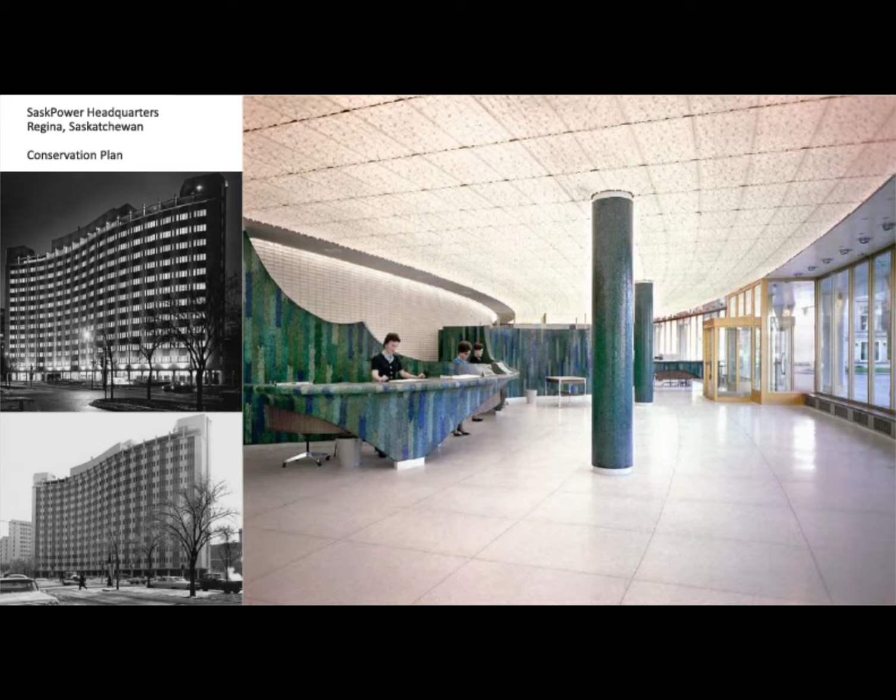So we very quickly sketched out a framework from which now a new design can emerge to make sensitive changes to the building entry, to the facades, to the roof, in a way that is in harmony with what this building was trying to be. And I like to show this as an example of where this has been very successful.

The Barbican, which is an enormous modern complex in London. Some of you may know it houses, I think, between 30 and 40,000 people, and it's got an entertainment center. It's got all kinds of things. It's a real sort of city within the city. And some years ago they started developing a series of design guidelines, which everyone has to use, and they are not as restrictive as one might think.

I mean, the whole idea of this, and the guy who did it, John Allen, is particularly sensitive to this, is that you can't just tell people you can't do things. You've got to tell them, here's your opportunity to do X, Y, or Z, not you are restricted from doing X, Y, or Z. And it makes all the difference in the world to cast it in those terms and in that mindset, so you're enabling people to do this well.

So, many of you are probably engaged in working with historic buildings. Some of you may even already be working with modern buildings. Is it different? And if it's different, why? I think, as with all of these things, there are multiple answers to these questions. But certainly, the big things, of course, are the idea of material versus idea.

In so many modern buildings, when the buildings wear out, rather than the material gaining a patina, which you can sort of scrub up and restore the way you can with stone, or even with good quality aged wood or copper, it's hard with many of the modern materials, especially if they're part of systems, to do that in a way that makes any kind of sense economically or from a sustainability standpoint. And so this notion has come up, well, maybe we're preserving the idea of what the building is, even if we're replacing the material. And there's a lot of validity to that, but there's also a lot of debate, and it's something where you have to be constantly vigilant in analyzing that.

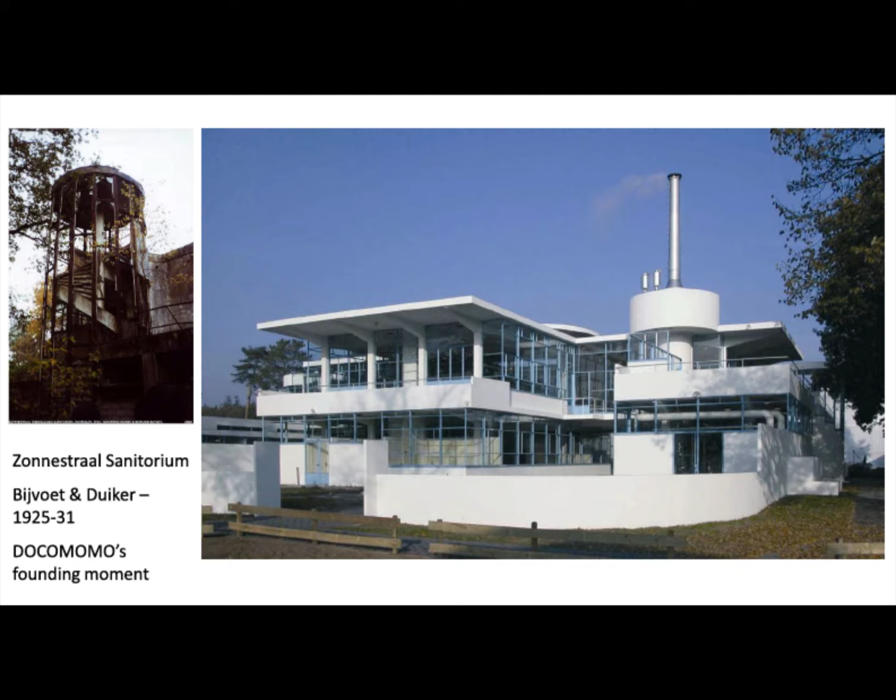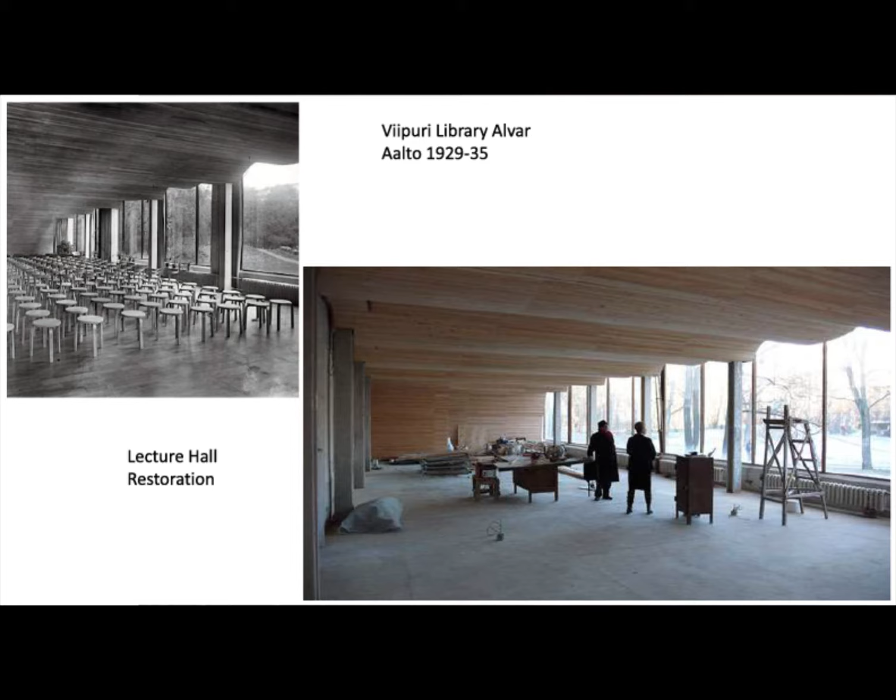Another example is a building of Alvar Aalto's, and most of Aalto's work actually does age much better than most modern buildings. This is an early one, and it's had its problems. The Viipuri Library was taken by the Russians in 1939 in the Winter War, and they kind of let it go. The ceiling that you see there in the upper left photo had completely disappeared. So here again, through a very concerted international effort, money has been raised to rebuild this, and in this photo you see the beautiful completed product.

But again, it's the recreation of something that had disappeared. And to a lot of preservation purists, that's a head scratcher. It's a little bit of a problem. It's not to say that they shouldn't have done it, but I think it's something that we need to constantly keep in mind and be vigilant about as we're working through these buildings.

So here's the statement about how much stuff we're dealing with. Between 1945 and 1980, more was built around the world than had ever been built in the history of mankind. I haven't been able to get data to actually substantiate my statement there, but if you think of all the building that's been going on in Asia and China especially, it's probably true. Certainly the population has doubled since then.

So the fact is, as the building stock from the 50s and 60s and 70s and even the 80s and 90s begins to age, we can't just throw this stuff away and say, well, now we're going to build high-performance, sustainable buildings, which unfortunately is exactly what the USGBC had been telling us for years. They've kind of pulled back a little, and they recognize more of the value of trying to save and retrofit buildings. But it's not easy, and in many cases, it's a very hard sell.

So these are some of the issues that we're dealing with. I don't need to read those out for you. I think these are self-explanatory, and then the technical challenges that go along with that. And so let's touch on a couple of the particular typological notions that we're dealing with. First is a curtain wall.

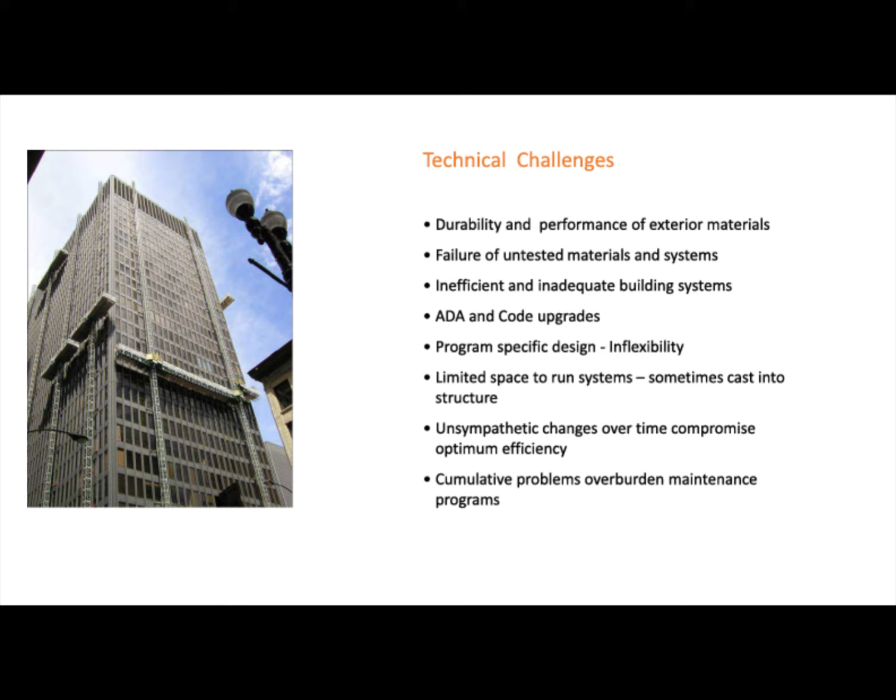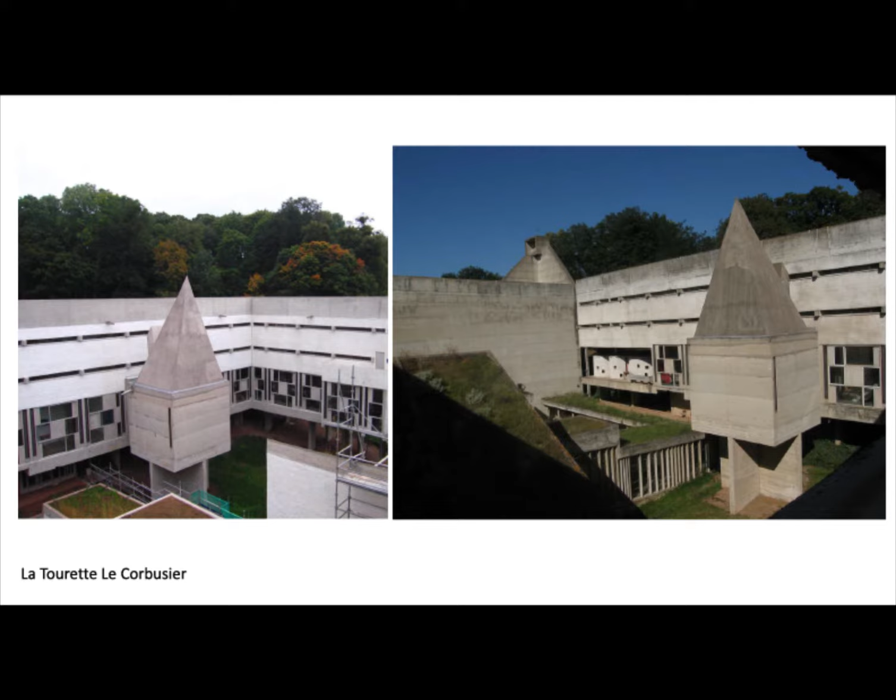And unfortunately, sometimes people, even in the best of situations, fall prey to the temptation to paint. I don't know why someone has painted this wall in the courtyard at La Tourette, which is one of the great concrete buildings of all time. There may be something somewhere that says it was okay to paint these particular levels. I don't know. But once you paint concrete, it's something different. It's not the same material anymore. It doesn't have the same kind of depth or resonance. It's not really a natural material, but it feels in many ways like a natural material.

So again, these are cautionary tales. These are the kinds of things you need to look out for. And I think certainly anybody who's working on a building that involves concrete conservation, get expert help. There are experts out there. It's never going to be perfect, but at least there are people who will guarantee that you will get not only the best appearance, but the most long-lasting technical solutions. There are people who are evolving better and better technical solutions to concrete repair.

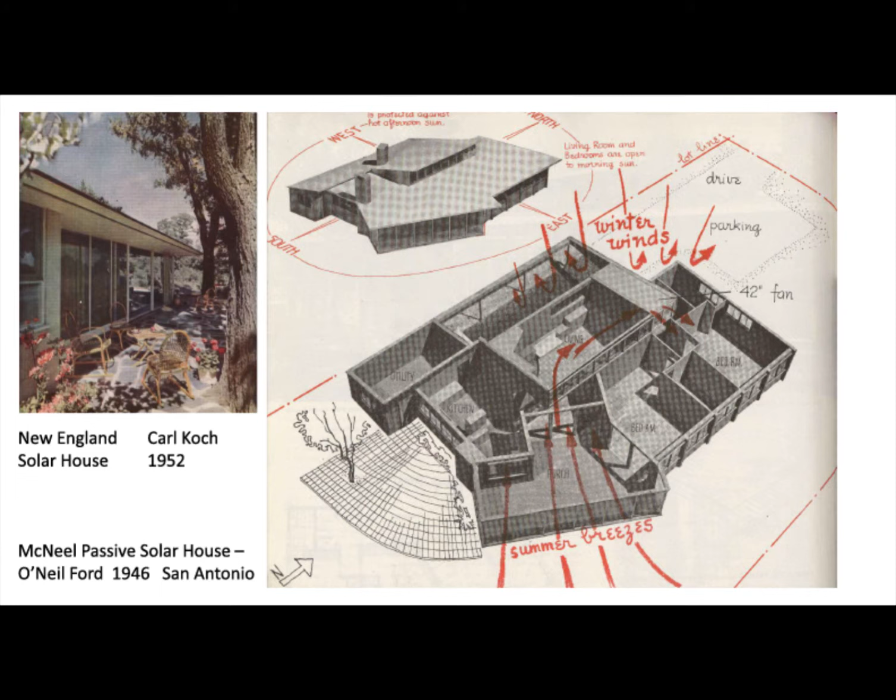And I live in a house that was designed in 1949 by a local architect outside of Boston. Very, very sensitive to sun angles in terms of how the sun comes in the winter and the summer, how it's sited, where the trees are. So these are not things that we have found anew since the late 60s or 70s. They were wisdom that was there and then perhaps lost and retrieved.

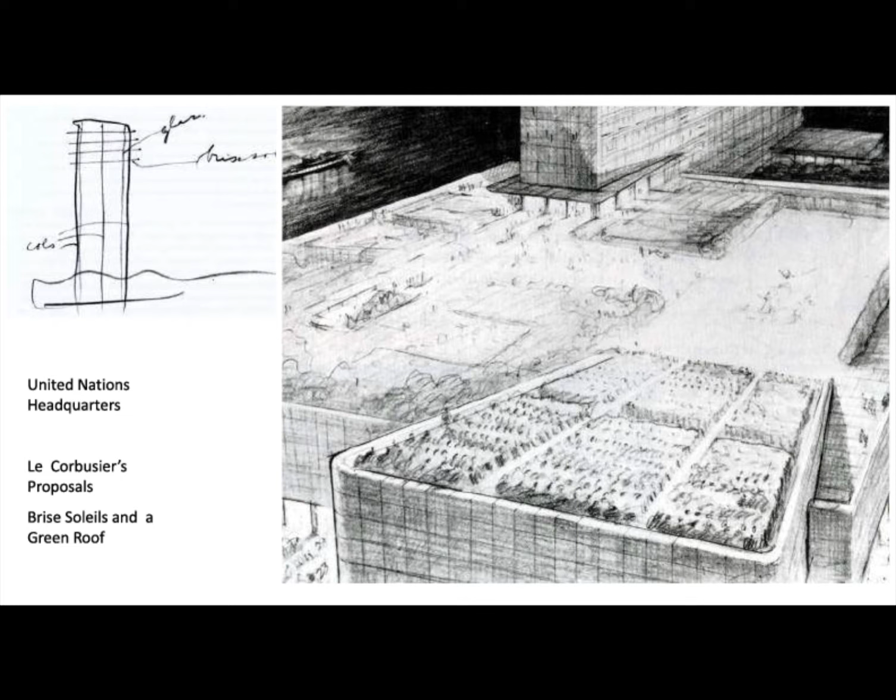And Le Corbusier's proposals for the United Nations. He wanted to put brise soleil to shield the west facade, because he had learned the hard way that you have to do that with his Cité de Refuge in Paris, the Salvation Army building, which he designed as a sealed facade with no sun shading and everybody inside cooked. So they had to go back and redo that. So he wasn't going to make that mistake twice. But he also proposed a green roof for the General Assembly. Never executed, but again, these are things to be reminded about, because this is 1947 that this is happening.

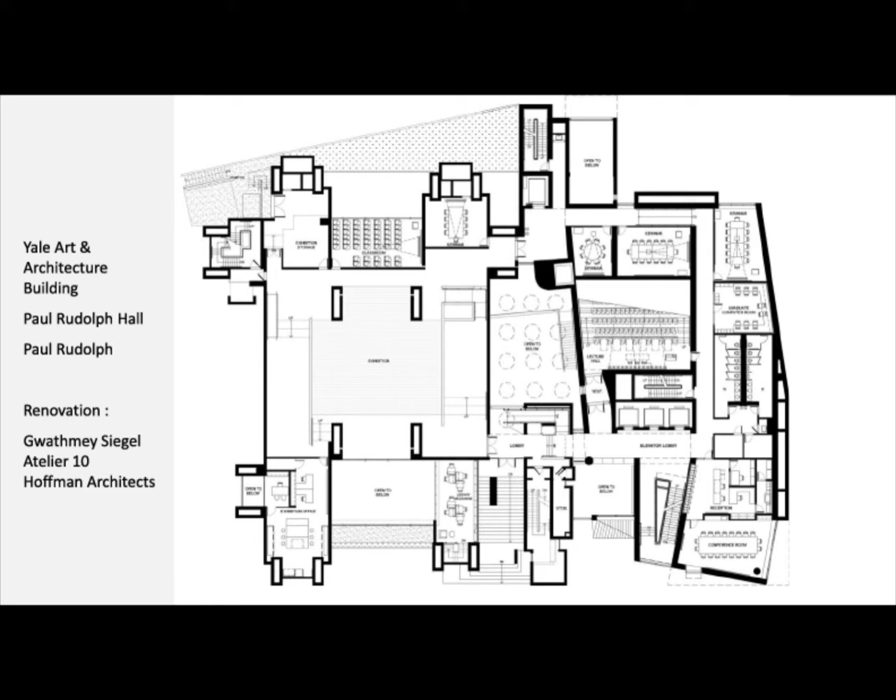But from the point of view of enabling the restoration of spaces like this and other things within the old Rudolph building, it did its job. But it's not something that everybody can do. It's a very expensive, time-consuming, exacting process that probably is only really worth doing on buildings of this level of significance. And again, as I mentioned, Atelier 10 was very involved from a sustainability standpoint, and in that it is a model project of what one can do with a modern building.

There's a whole lecture that goes with that. I'm just making you aware that it's out there, because they did a lot of things to really maximize the potential of what was in this building through very careful analysis, strategic use of sun shading, and what they did with the mechanical systems, airflow, all kinds of things.

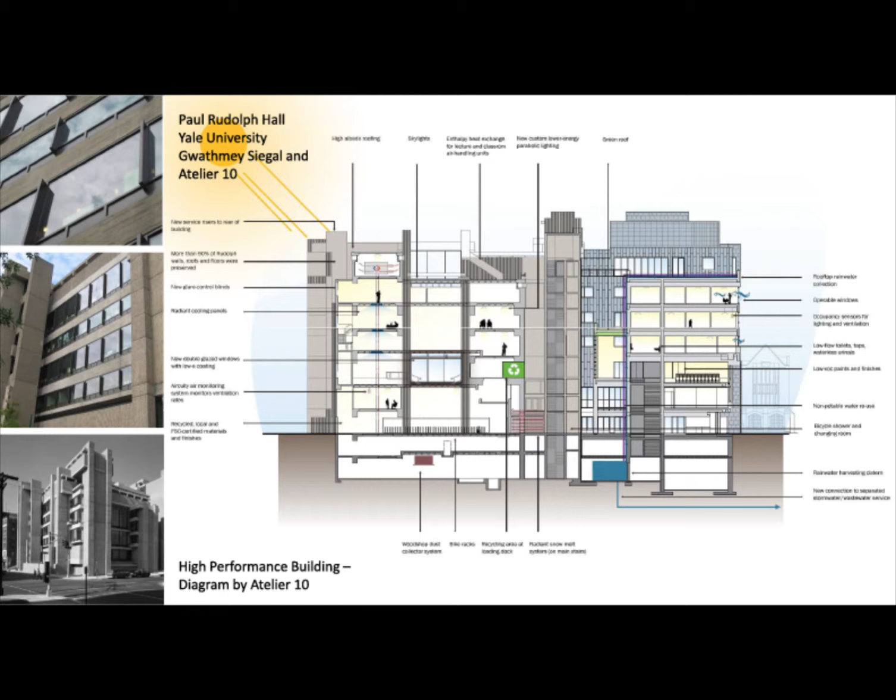Very exemplary project. Sometimes it doesn't work. Sometimes no matter what you do and how hard you argue, a building with the significance of Bertram Goldberg's Prentice Women's Hospital in Chicago, it's just that the land is too valuable, and frankly the use was too locked in. It's a cloverleaf-shaped building with radial rooms inside, and everything's done in reinforced concrete. What do you do?

So we do lose these. We've lost the Paul Rudolph Government Center in Goshen, New York, to a very insensitive addition and renovation. We've completely lost the Third Church by I.M. Pei near the White House in Washington. There are many examples of these.

So, a little bit on design and Secretary of the Interior standards. I want to look a little at the whole idea of language and compatibility, and how one sort of fits things together here. The idea is, of course, that it's supposed to be differentiated. It's supposed to be harmonious, compatible, but different. And there are many different ways one can do this.

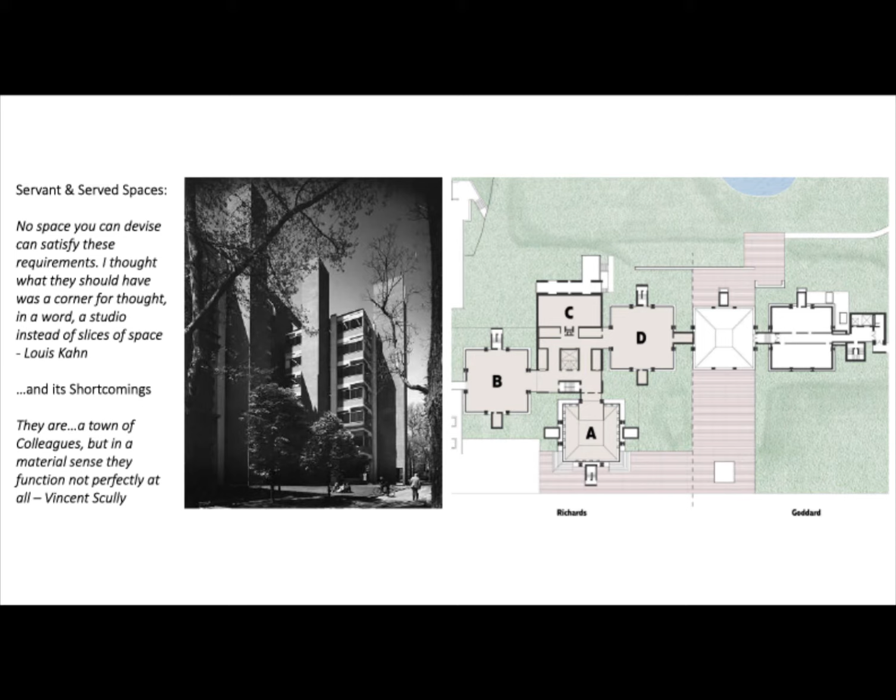So I'll quickly go through these, just show you some studies how much he was really fascinated by the idea of how you express it. Those are duct shafts, that's all they are, and the idea that there's more air coming at every floor. And then here, these many articulations of the Vierendeel trusses getting thinner and thinner as they come off of the cantilevered columns here.

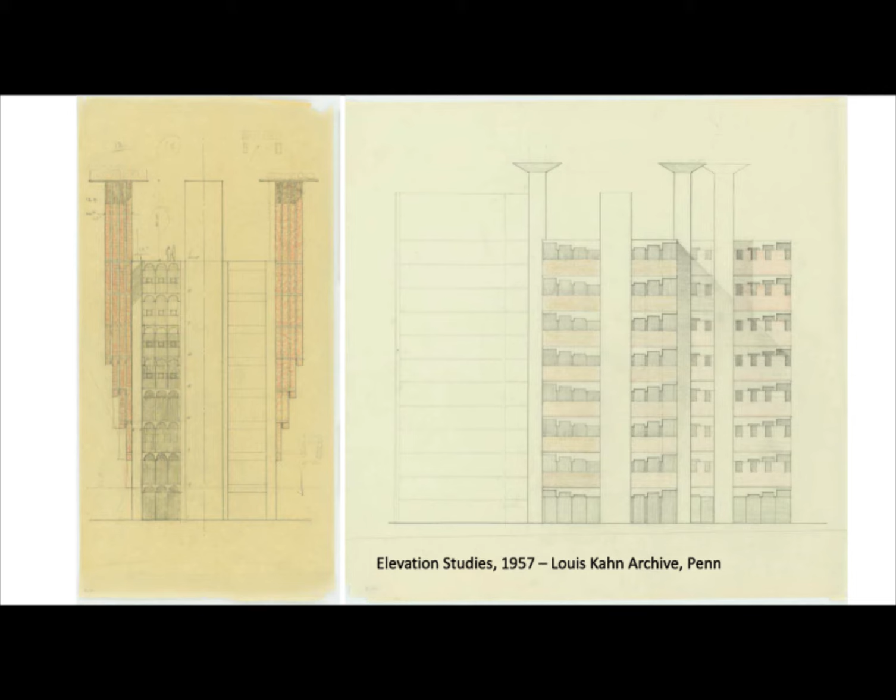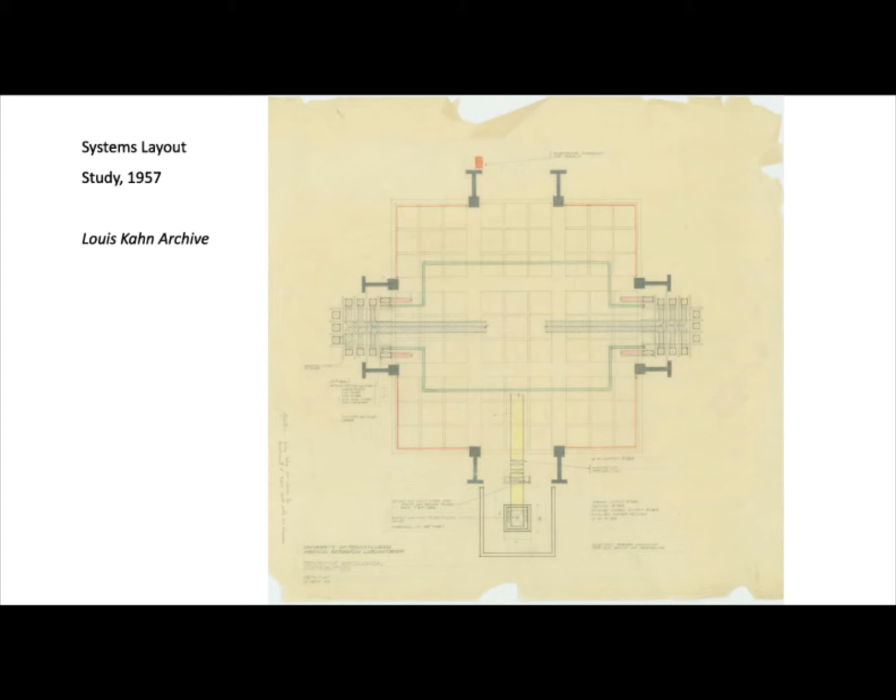So there's a very literal and almost childlike, passionate investigation of this stuff in the early stages of the Richards building. And here that is in plan. You see that even early in schematics, he's already doing his duct and pipe layouts to see how that's all going to work off of these individual tray floors.

So what you have here then, as the building comes together, is a system of poured-in-place concrete columns, precast Vierendeel frames, which are these things, coming together in an ideal, which is this 9-square grid with a 4-square grid inside. It got value-engineered down from 9 and 9 to 4 and 9, which is really a much more elegant solution.

But then here's the architecture. Here you can see where all of these partitions are dividing up these floors. And Kahn just kind of did, he didn't want to know about that. It had to be there, but it was foreshadowing being very problematic.

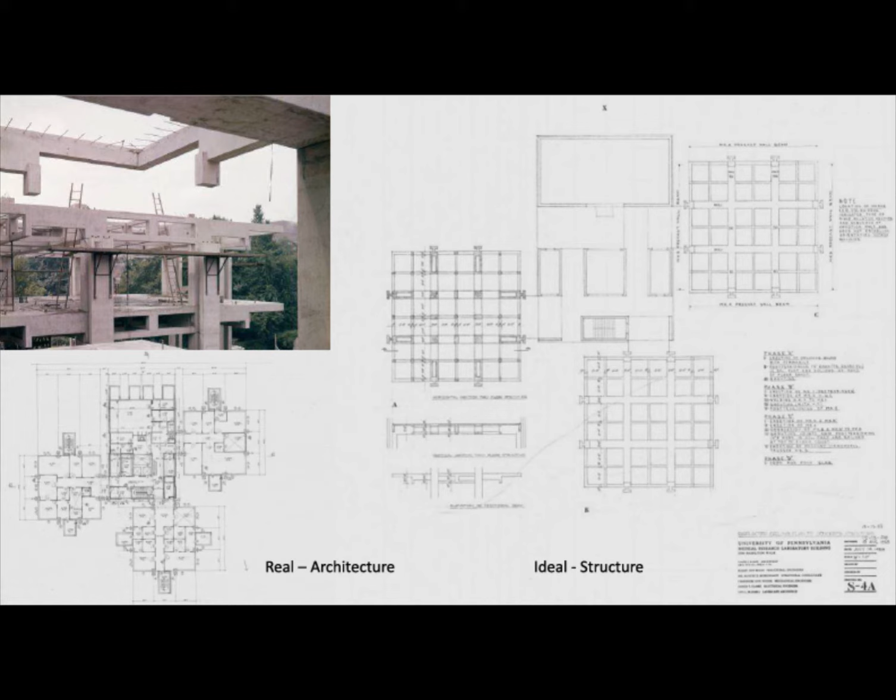So here you see the building being built, a couple of photos in construction. Very profound, literal expression of how the structure works in this building, and then how the systems were laid out.

You have here the design principles, which are very clearly stated in the working drawings about where you put each system. It's all called out here. It's all layered and leveled.

And interestingly enough, when they started building this, there had been a change in the drawings, and the contractor started laying this out, and Kahn came and said, you have it all wrong. He actually made them tear out all the existing ductwork and do it again because it didn't meet his standards. And I think that was probably the beginning of some trouble with the University of Pennsylvania.

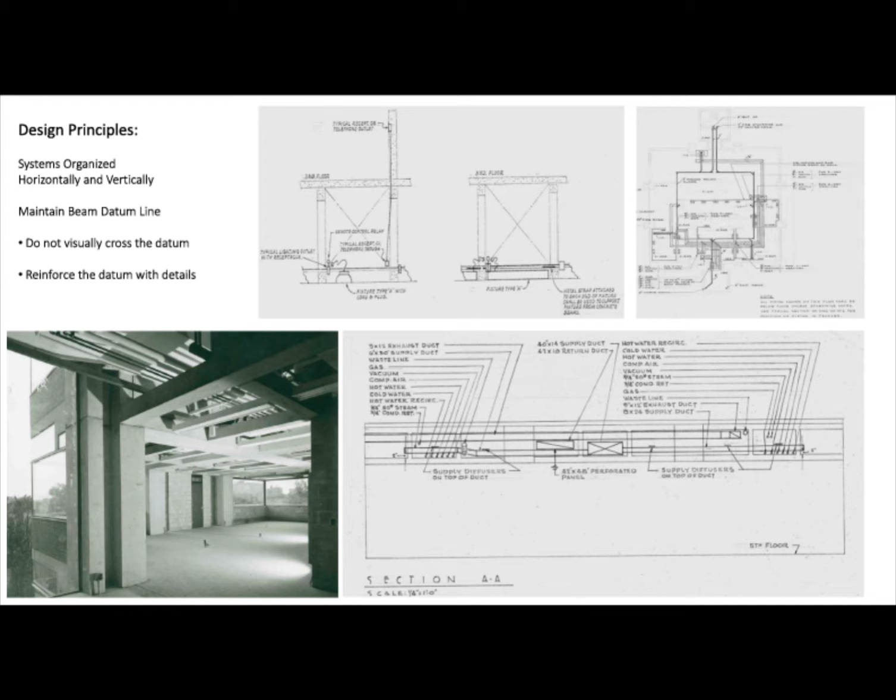But in any case, what you see here, this is really the ideal. This is so you have the structure, you have the systems beautifully layered, and you have this open universal concept. It's the closest thing Kahn comes to an idea of universal space, because Louis Kahn really is about rooms, not about space. But with the open corners, I think here he's pushing that envelope in a way that he never did in his subsequent work.

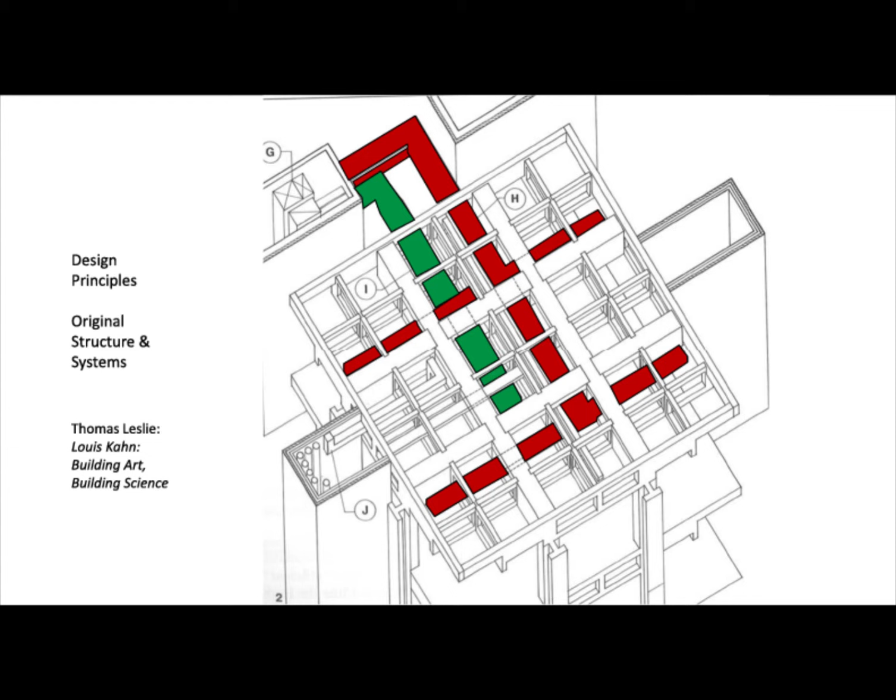And there you see this beautiful diagram from Thomas Leslie's Building Art, Building Science, about how that all goes together. So in the end, this is the building in its purest form. This is after the basic construction is complete, but before all the partitions go in.

And it's really these series of lovely stacked vitrines. You can stand in the corner and look off to the people across the way in the other corner. You could do that even after the work was finished. But it's very much this idea

about individuality and community at the same time, which the greatest architects of the 20th century were all very obsessed with. I think Alvar Aalto did that, Kahn did that. They were people who really understood that balance between the space for the individual and the idea of the larger community space.

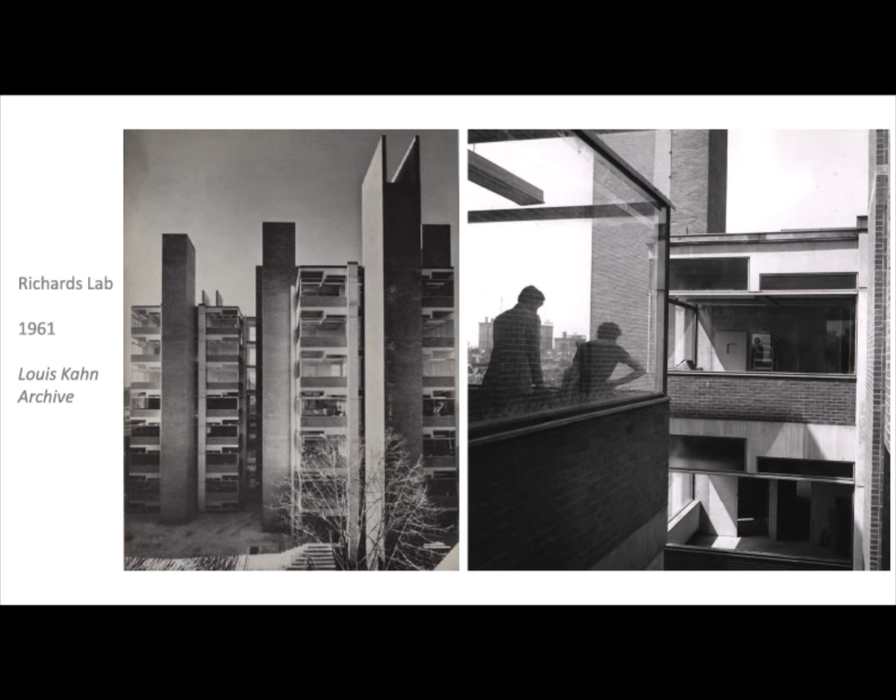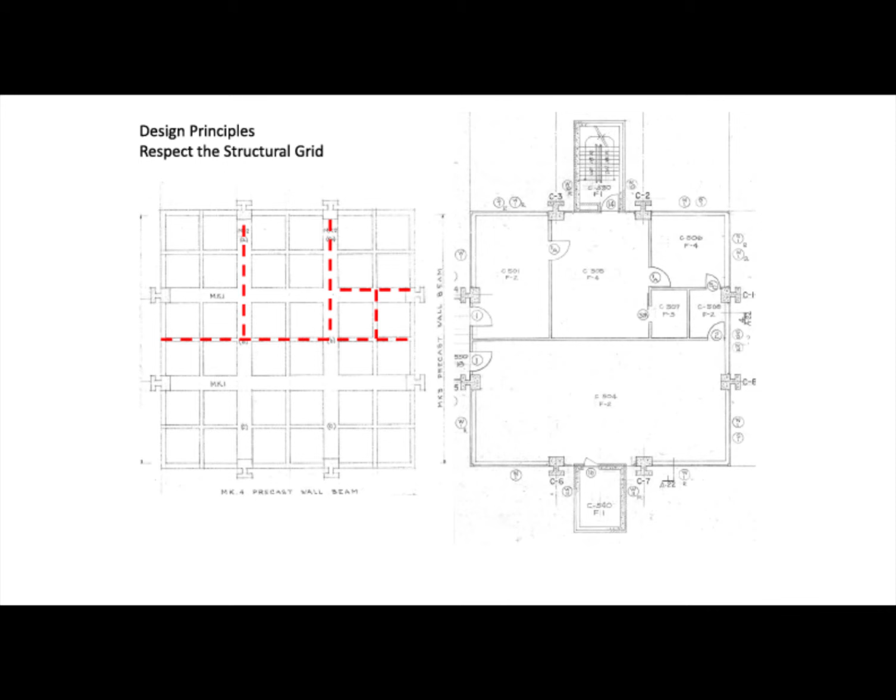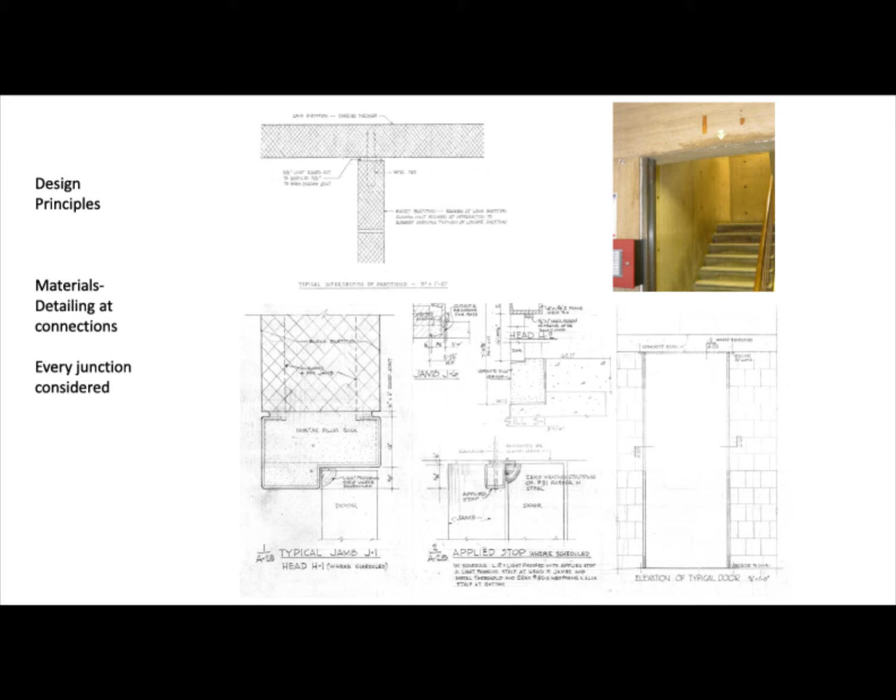We turned it from a wet lab, in short, into a Center for Cognitive Neuroscience. So we basically took all of the fume hoods out, all of the wet bench out. It's all computational at this point, so that made our job a lot easier. I think this is a case where a change in use and adaptive use was important really to save the building, and then make the building function better. That's really what we were after here.

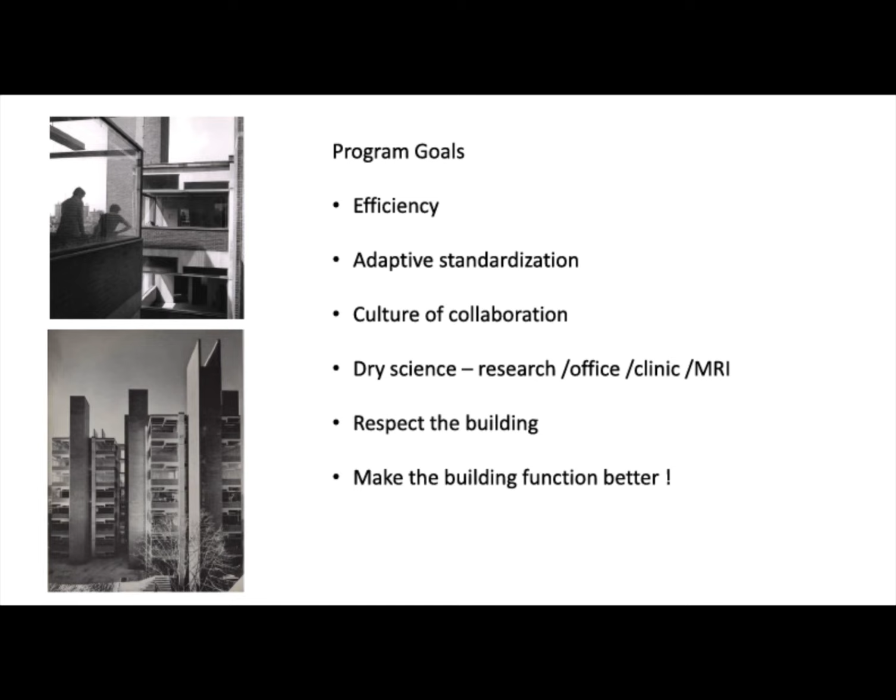you would think they would be the most important part. They are on the outside. But on the inside, because they were all cut up into these little rabbit warrens, there was nothing of significance in that. So we said, there are principles to be respected, there are guidelines you're going to have to follow, but it's not going to be the reconstruction of what was there.

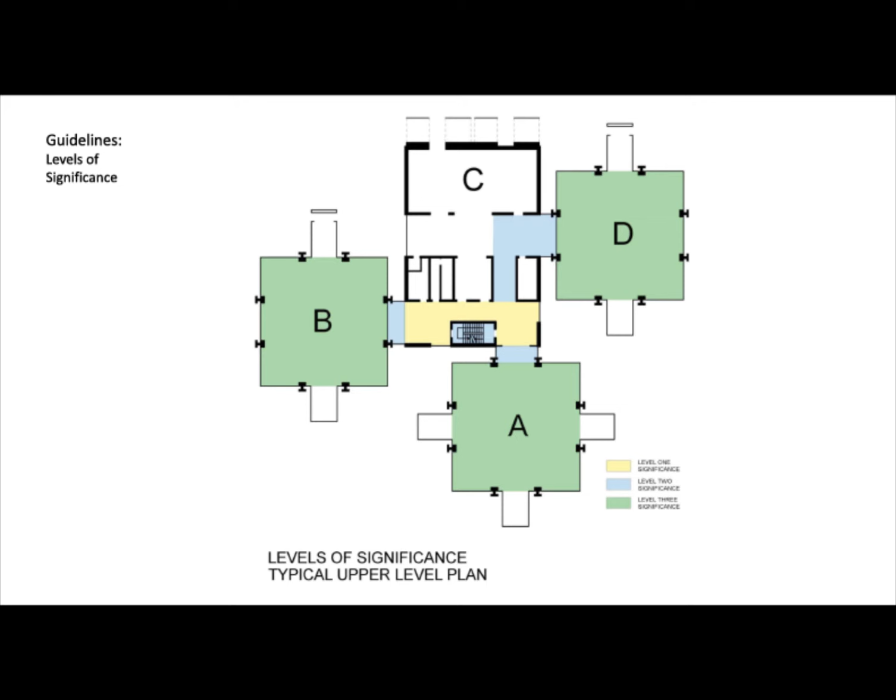So there you see the original 5th floor plan and what our design did, and I will talk about the evolution of how this came about.

So first of all, you have the reprogramming of the interior spaces in the C tower—I won't go into that—and then you have the offices in the D tower. Very important here for the offices is that we had to find a way to make these egalitarian. There used to be that an office would go like that, which would give you a big corner office and a little inside office. Penn wouldn't allow it.

They said, you have to find a way to make these egalitarian, the same. So we looked at the grid and said, all right, what we have to do is find a way to offset, to actually set off from the grid. And we found a precedent, both in this building and in other works of Kahn, for how he does that—how he says, okay, I've got these very strongly articulated grids, but sometimes you've got to move things, so here's a way to do it. So we took that as our clue as we designed a way to manage these offsets.

And then, so that's the idea of the right sizing, because that's what the office size used to be. And then also very important was to honor the original idea of the open floor by always leaving one corner open. So what we were also able to do in democratizing these sizes here is create a wide enough zone in the center to put in these workstations. So that now you can set up a whole bunch of graduate student workstations here. You put another cohort in the corner.

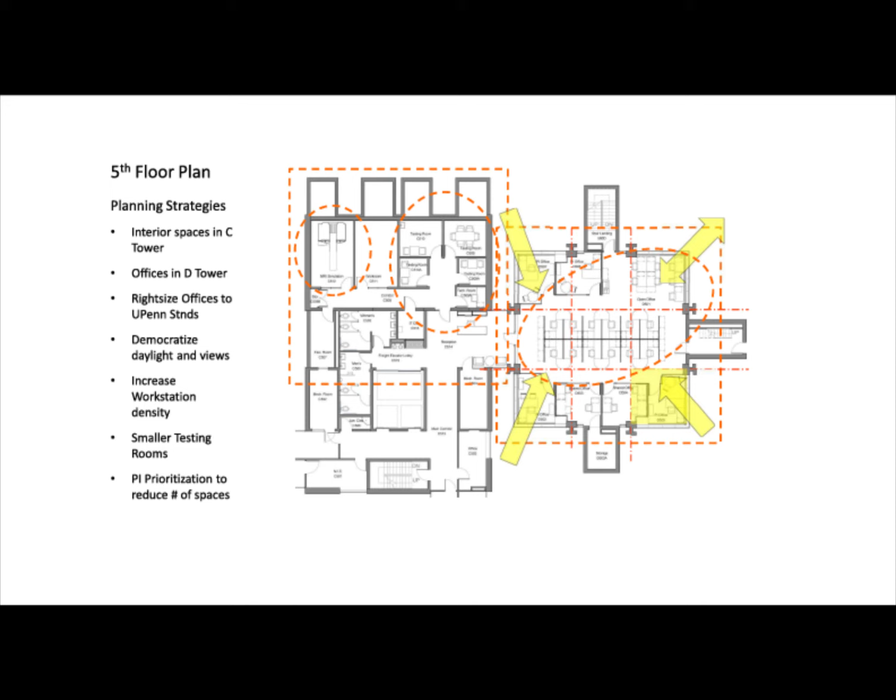It's open, and you really get a sense with the glazing of these partitions and all that you've got a very nice, manageable open space. So that's, and then the testing rooms and the reduction. So I'm going to take you very quickly through what we did with the glazing.

This building here on the left is the American Federation of Labor Medical Services building. It doesn't exist anymore. It was built just before Richards in Philadelphia. And I show it because it's the first time Kahn used a system for the windows of a custom-formed brake metal and stainless steel. Kahn didn't like the windows that were out there. He didn't like steel windows. He didn't like the aluminum windows. He tried them both. He was not happy with them, and he began to develop his own bespoke system, which he used all the way from this building to the end of his career, right up through the Yale Center for British Art in the 1970s.

So just to look at some of the issues we were dealing with, obviously there's the issue of solar gain. They had these cool shades which were taken off at some point in the distant past and never functioned very well. We also had movement in the building. If you sight down that corner, you'll see that the corners are tipped out, the bricks move, and so we're not dealing with sort of perfectly planar elements. And then here again, other examples of the shading.

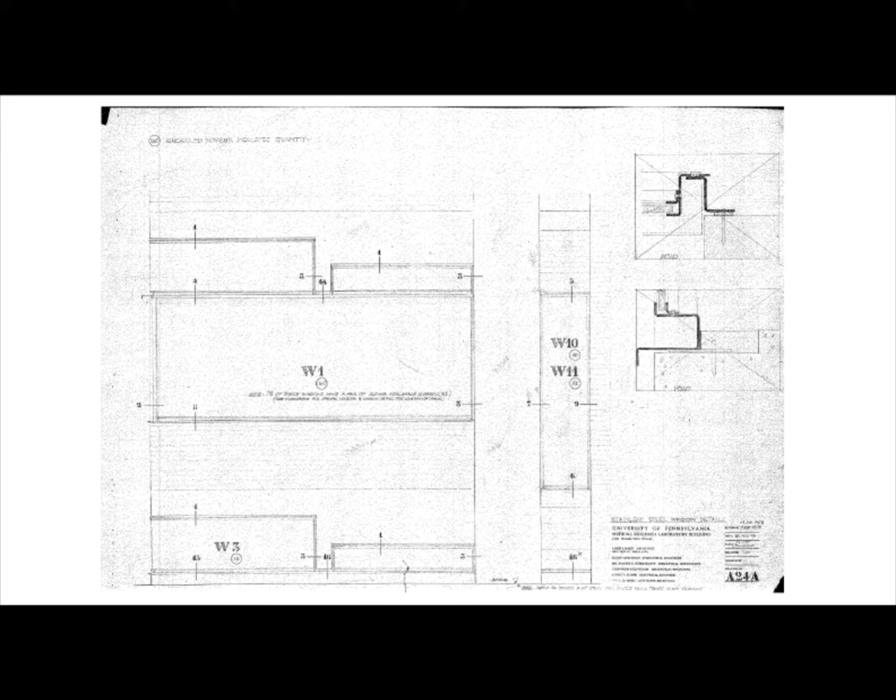Kahn's original glazing details: you see this is a very big window that's almost 15 feet wide by 5.5 feet high. So these are substantial pieces of glass, and they were 1/4-inch polished plate, which means they kind of did this in the wind. And there you see that very elegant brake metal section, very minimal, nothing to it. And this wonderful corner detail with the cruciform column, which he never replicated anywhere else.

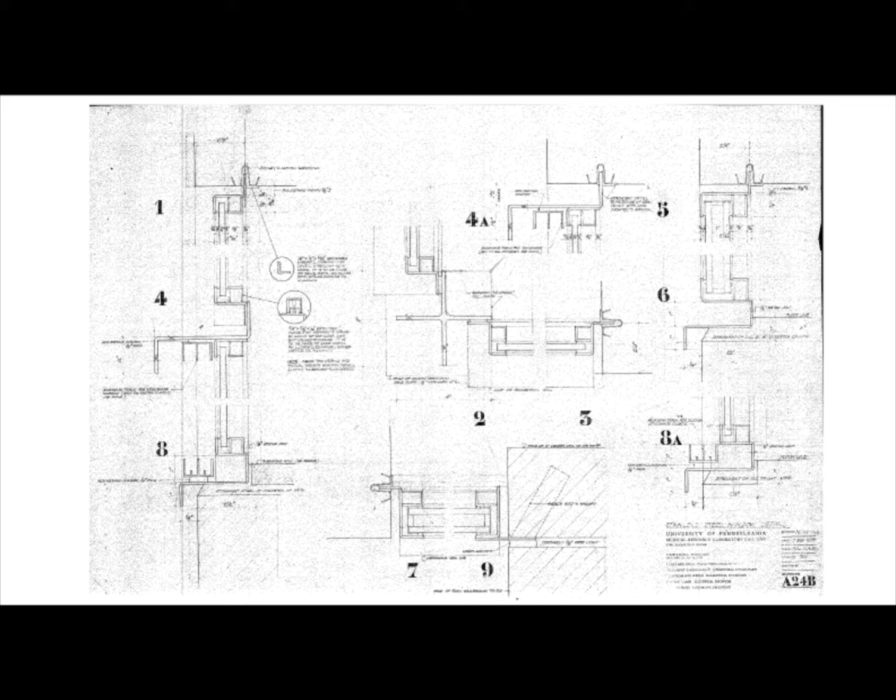So our challenge was to say, what can we do to save this? Because there was no way that we were going to take that framing system out. Not only is it part of the history and aesthetic of the building, but it also would have ruined the concrete and brick into which it was set. You'd have to destroy all that to take it out. So we had to find a way to try to make this work as best as possible. And I noodled about this quite a lot. This is just one of my noodling sketches to try to see, is there a way that we could change this to make it thermally broken and with an IGU.

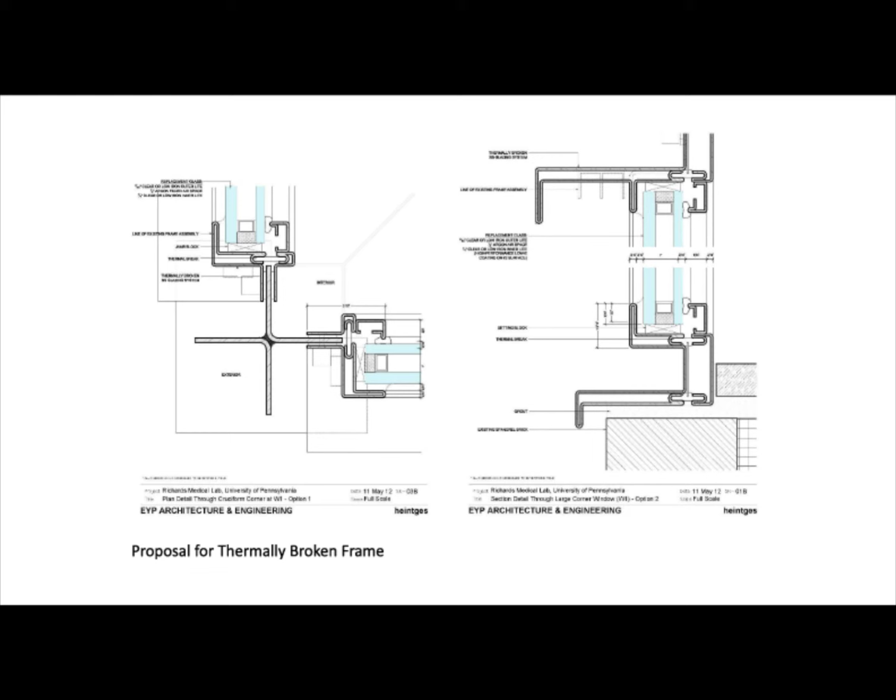And we were a little more scientific here and tried looking at this and really determined that it wasn't worth it. Not only from a payback standpoint, the building would never really look right, and if you really looked at the overall energy performance and the idea that we were tightening this thing up enough, we ended up with a laminated glass, which you see here. That was the ultimate solution. So here's the original. Here it is without the thermal break, but with an IGU, with a stop which may or may not have actually worked. And then here with a laminated glass.

So we tried to get as high performance a glass as we could while maintaining the color balance, because that was obviously very important that it still looked clear. But we were able to use the interlayer and the surfaces of the inside to put in a high performance coating and to hopefully create something that reads very flat, because the other problem with an IGU is that on a piece of glass that size, you get this warpage because of the difference in pressure between the inside and the outside.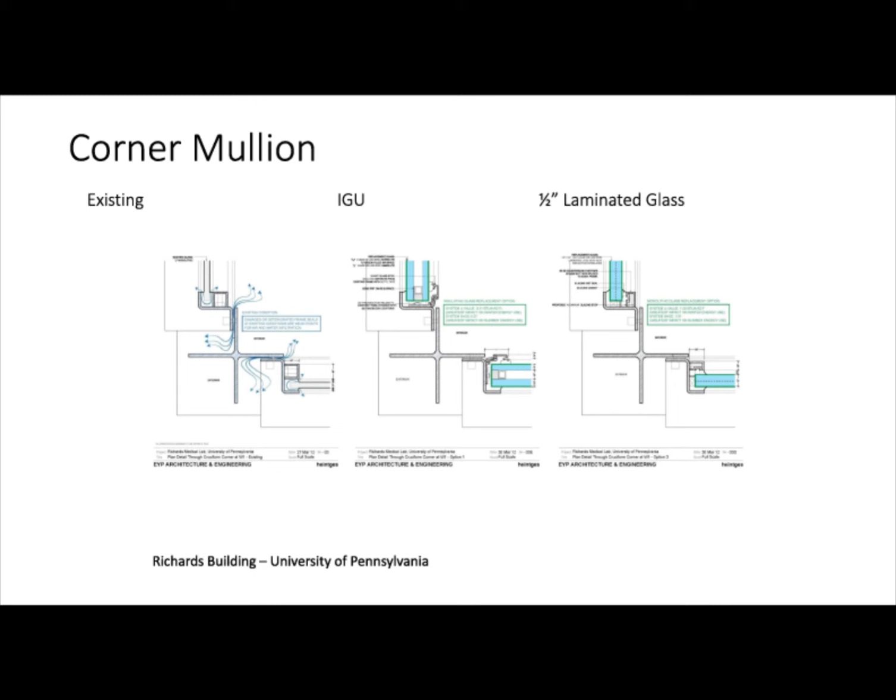You don't have that problem with an IGU. With tempered glass, you have roller wave, and you also have the problem of exposing the coating either on the inside or the outside. So lamination is a good solution. Hopefully it will last a very long time. Vinyl doesn't last forever. We can't guarantee exactly how long that will go, but it certainly should be at least for, let's hope, 50 years or more in any case. So that was our solution.

And we also, at the same time, were working with the systems to work through, again, the layering, honoring Kahn's system, but now putting in chilled beams instead of a VAV system. In tightening up the envelope, we were able to improve the performance of the envelope sufficiently to enable chilled beams, and that's where we get the big energy reduction. So we were able to create the energy frugal system that Penn was looking for.

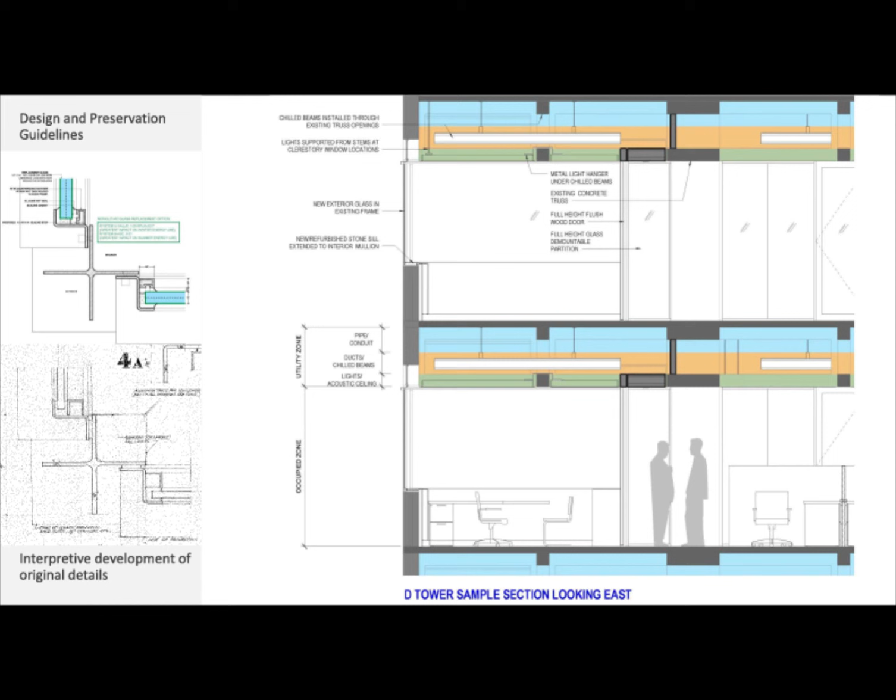And here you see this is some of our Navisworks coordination drawings, and that little diagram on the left there is the detail that we found for some back of house areas for how to do the offset in the ceiling, to be able to create that offset to move the partitions off the grid.

This is the analysis of where we ended up. And it's this one. So it's not perfect, but there's your baseline. That's what we started. That was the best we could have possibly done, which would have ruined the building from an aesthetic point of view. So we're about 80% of that, and everybody felt that was good enough. And it's important to note too that one of the drivers for this project and funding for this project came from a Century Bond initiative, which is directly tied to sustainability improvements.

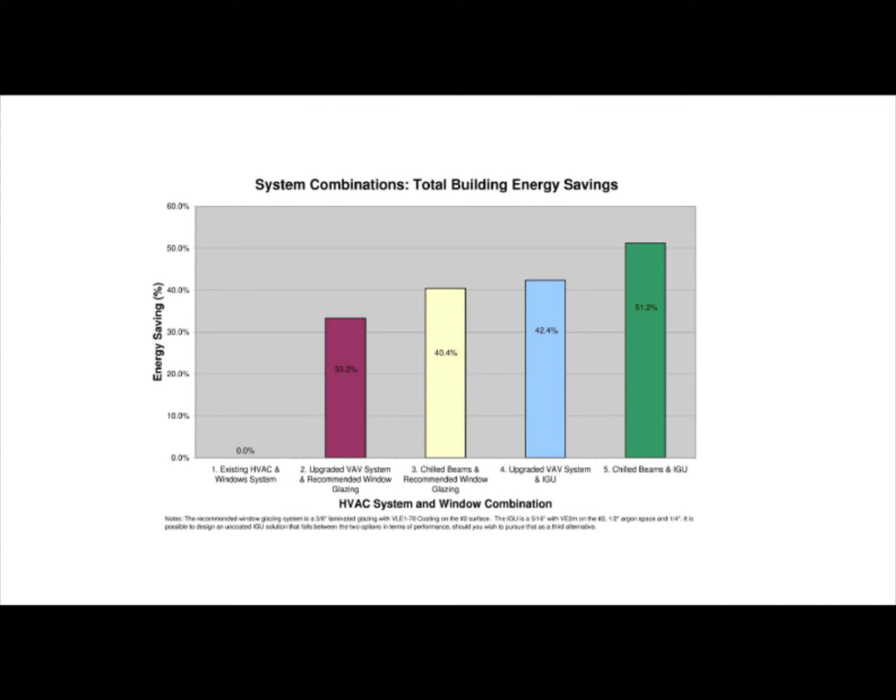So these are the kind of adaptive solutions that we did. There's a photo up there of us checking a mock-up of the glass. There's a finished corner office with the offset partition.

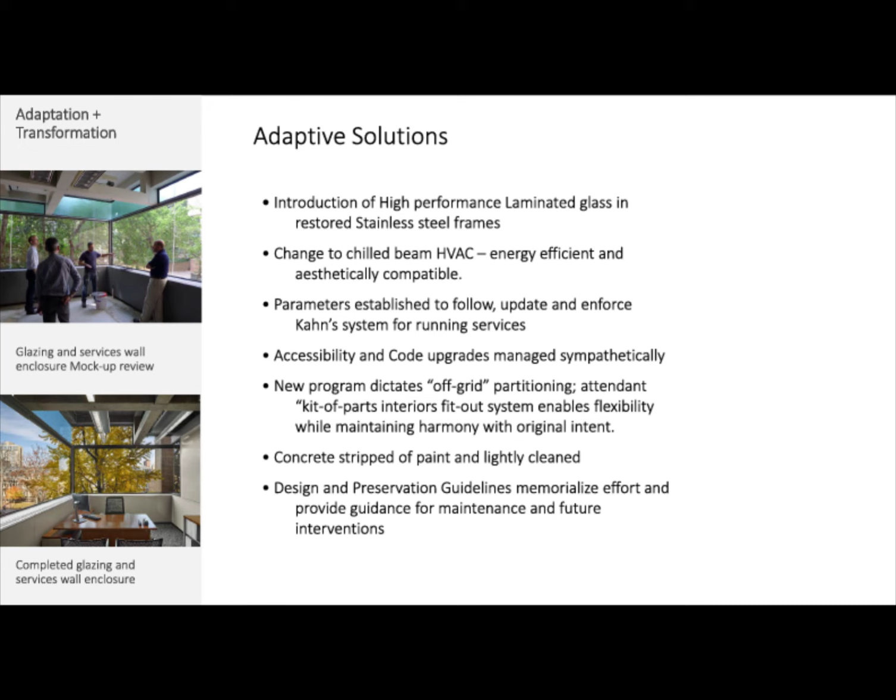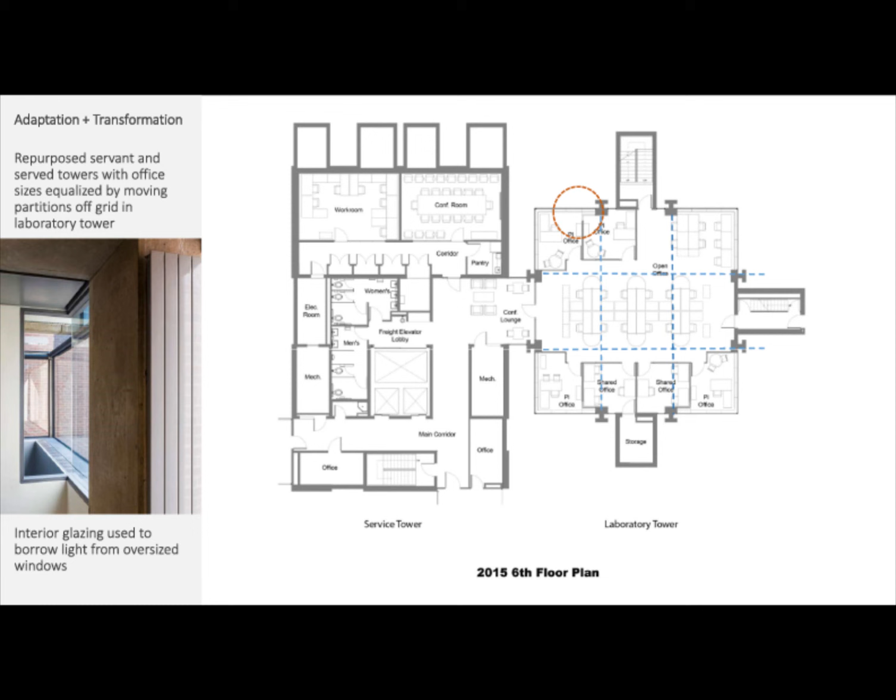The idea that by offsetting a partition here and offsetting a partition here, he's creating enough space within the realm of the structural grid to fit a room. So it's an idea of how one breaks the rules in ways that are creative. So this is a typical view of that corner. The idea of basically insetting a piece of glass inside the big light in order to get borrowed light across there. And then here, the actual panels of the offsets and a space now big enough to accommodate workstations.

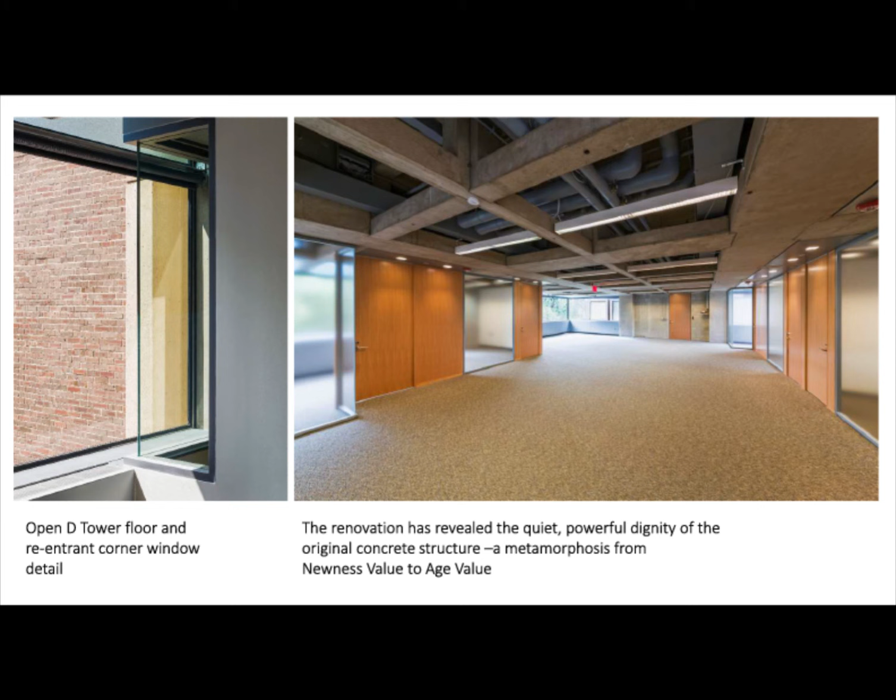The concrete was cleaned. We just gave it 2 coats of Simple Green. We decided not to do anything special, even though it was pretty mucked up in places. And frankly, that was enough just to make it glow. What I said before about concrete feeling in some ways like an organic material is very true in this building. There's a warmth to it that actually is part of the patina, because as concrete carbonates, it does go from a gray more and more towards a beige color. It warms up in color over the years, and that is quite evident in the quality of this building.

Very minimal renovations to the lobby down below, but you see some of what we're dealing with in terms of systems coordination up here. You can't keep clear of the windows all the time. And then there is the image with the Steelcase furniture, which we're very pleased to have. And I'll end it with that. You can read through this, and if there is time, I'm very happy to take questions.

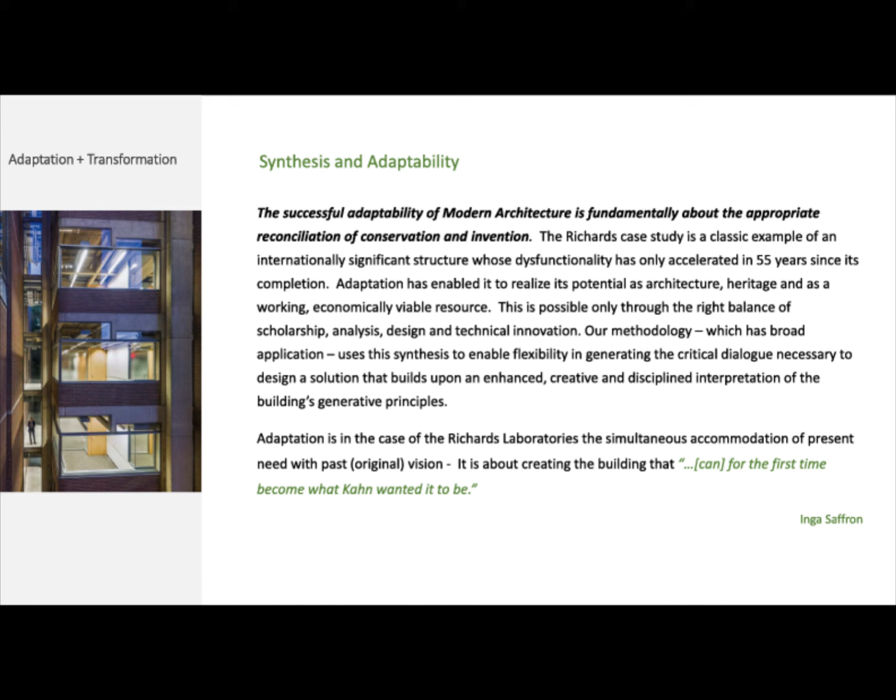Anyone? Yeah. You mentioned Dulles earlier, and it had achieved a historic status much sooner than 50 years. Is there a process for that? Yes, there is. Within the Secretary of the Interior standards, there is, I believe it's Section G, if I'm not mistaken, which is the argument for exceptional significance. If you can make an argument to the Department of the Interior that your building has exceptional significance and should therefore be listed early, they will hear that. Yeah.

No one else? Sorry to keep you so long.